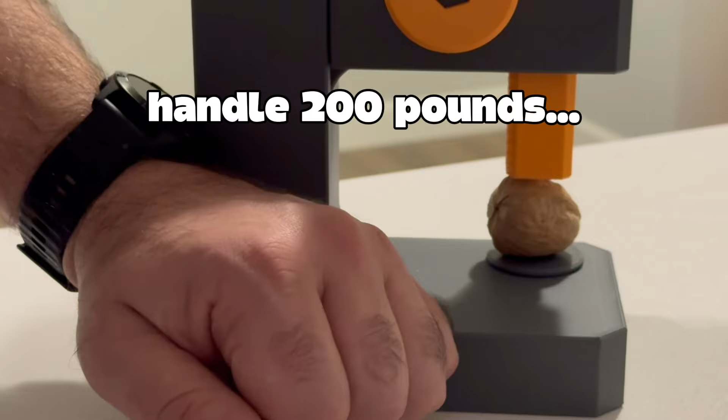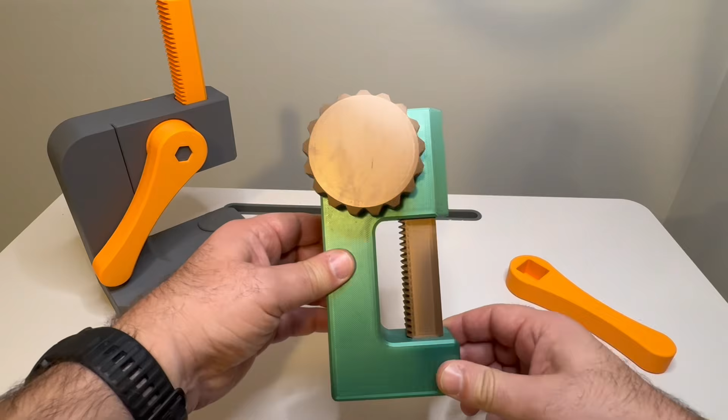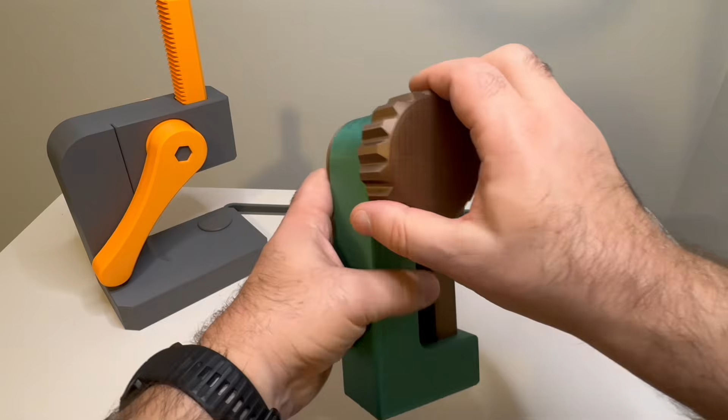This was a great little press. I made it with this knob originally and realized it was a lot stronger than the force I could generate. So we upgraded it and put this arm on, which made it an awful lot stronger.

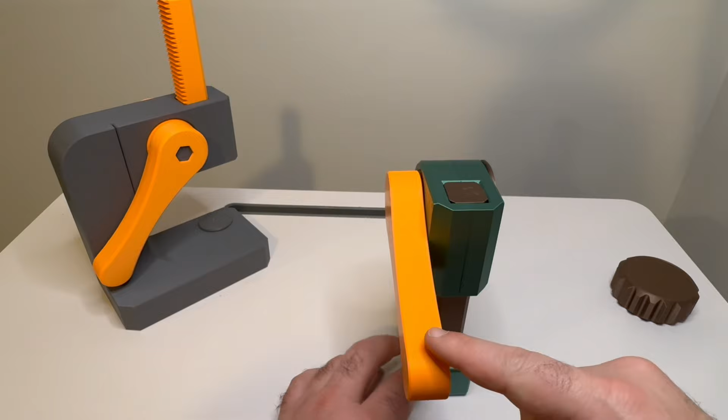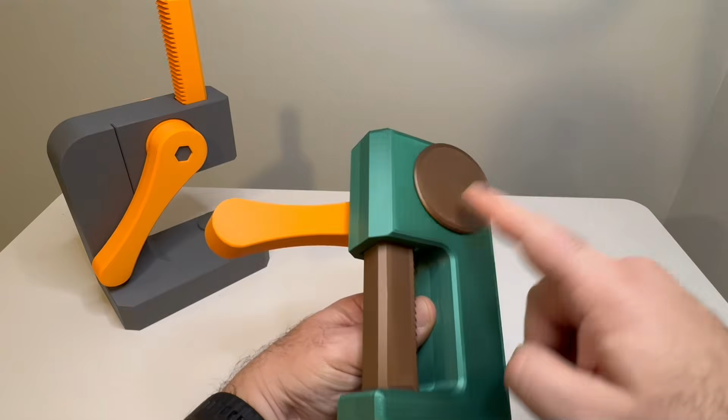But now we've got tipping. It wants to tip towards you, and it also wants to tip to the left, to the arm side. We also had a problem where there wasn't enough space to fit a very large part underneath the ram. In addition, it was hard to get these parts apart because I made them fit really tight, which is necessary for operation, but makes it really hard to disassemble.

In comes the 2.0. This still has the same working components as the other one. We've added a hole and a little part stand that covers it up when you don't want the hole. So if you're trying to knock something out and need to push a pin through, you need this hole for the pin to have someplace to go. And when you don't, you just cover it up and it's like it's not there.

This comes apart a little bit different. This plate comes off, and the rest is all printed as one big piece. But we've got the knockout holes, and we've got a much deeper throat here that makes this a lot more versatile.

And while this one still does want to tip, it doesn't want to go to the left. It still wants to come towards you, but you've got this big shelf to hold it down, and it works great.

We wanted this to be a fully 3D printed project as always. No glue, no fasteners. We also wanted to print without support, so this is printed entirely without support. Let's look at some of the design considerations that went into making this, and then we'll move on to assembly and printing.

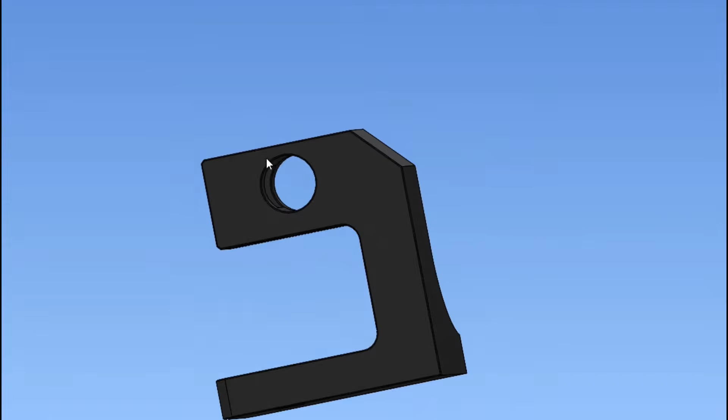So this is the press housing, and we want to print with no support. We want to lay it down like this. This face will be on the print bed, and that meant we couldn't print this wall.

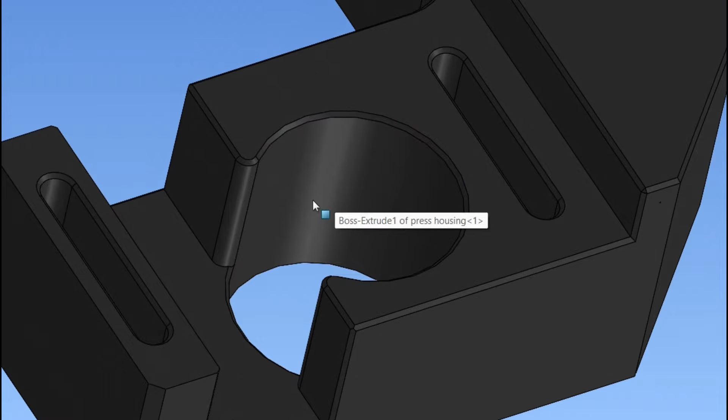This part's removable. These are the connecting features. They're tapered and go into interference, so you push these faces down flat and they're really stuck hard. You can get them back apart, but they don't come apart on their own. They seem to stay right where they're put during operation.

So that finishes the containment for the ram and gives it the means to move up and down. This is the inside of the plate for the side of the housing, and these are the features that interfere with the holes to hold the thing on.

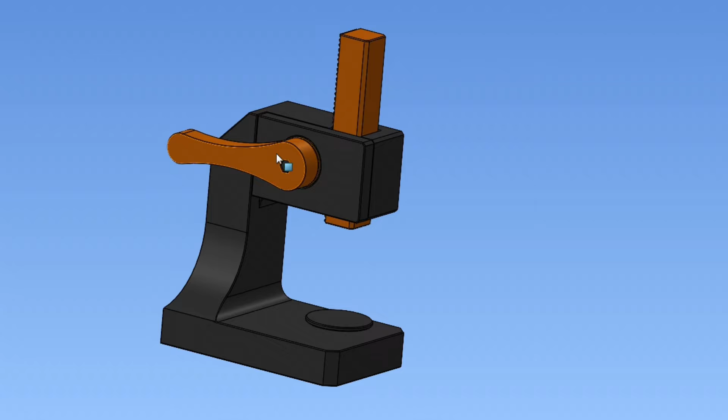So the general idea of this thing is rotate the arm, move the ram. You get a lot of leverage from the length of this arm, and inside there's a rack and pinion system. The handle is attached to this gear. When it turns, it's meshed with the teeth on the backside of the ram, and in the counterclockwise direction the ram goes down, clockwise direction the ram goes up.

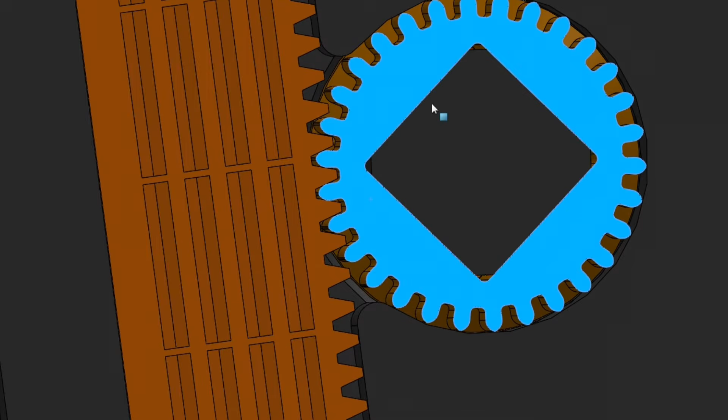On the inside, I've cut all of these holes so that we get more wall thickness material. Basically, the grid in here will print much stronger than the infill support would have, so I've got it in both the ram and the vertical posts of the back of the press.

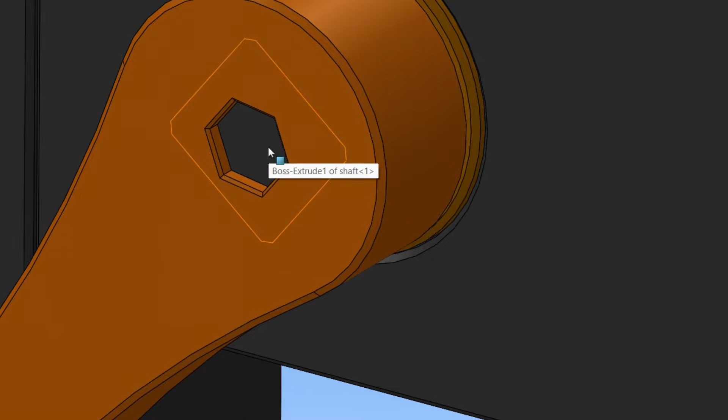These knockout holes were added from the last one, so this is another upgrade. It really helps to get them apart. It's easier to push than it is to pull, so this will help us take them apart when we need to. We've got a deeper throat here, so you can fit more things underneath it.

This is a removable part stand. If you use it with the part removed, you can use it to knock out pins and have some place for them to go while something's laying down.

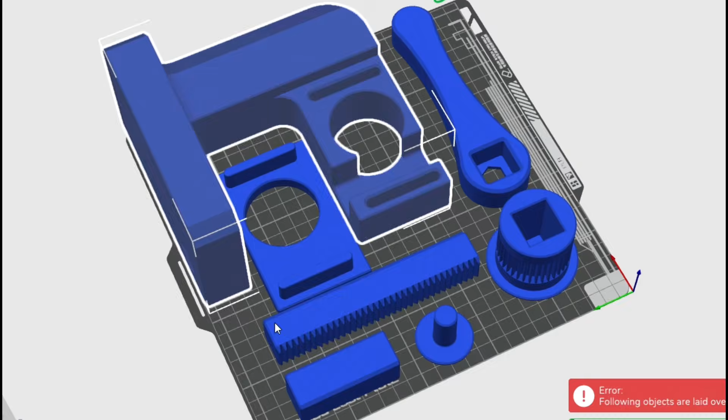This is the build plate setup. We want to print all these parts in these orientations to avoid the need for support and maximize strength. The press housing wants to be on the flat side with the holes facing up. This plate wants to have the post facing up. We need to print the teeth and profile for strength.

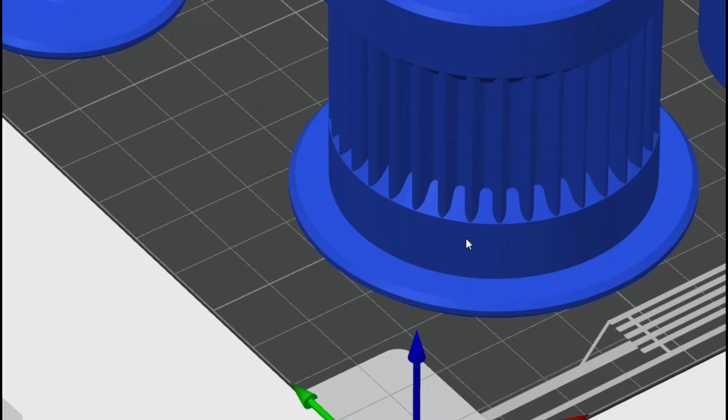The shaft we want the lines running this way for strength, and the gear we want this way for strength. Because we needed to have these large diameters that are larger than the gear, there are these chamfers on either side. That's an overhang that we can print that just allows us to make these shapes.

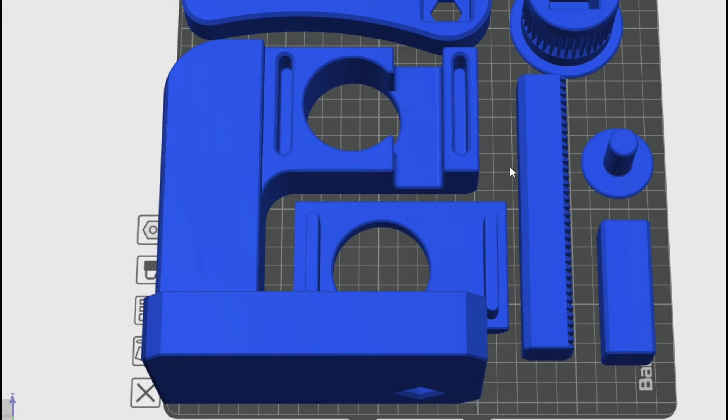So these parts need zero support, and I've sized it so that the dimensions on this are maximum 175. So if you've got a build plate that's 180 millimeters square, you'll be able to fit this. Not all of it at once, but this part will fit - that's the biggest one. So now we're going to take a look at putting it together.

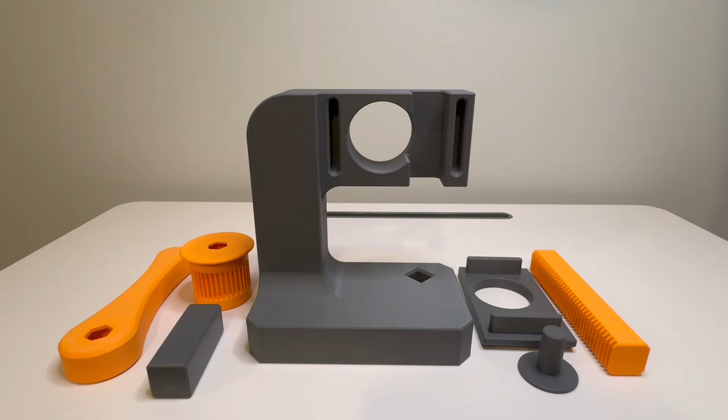Now that we've printed all the parts, this is the removable side, so we could print this without support. Remember, this printed flat down, so there's a big chamfer on the front. That matches up with this side.

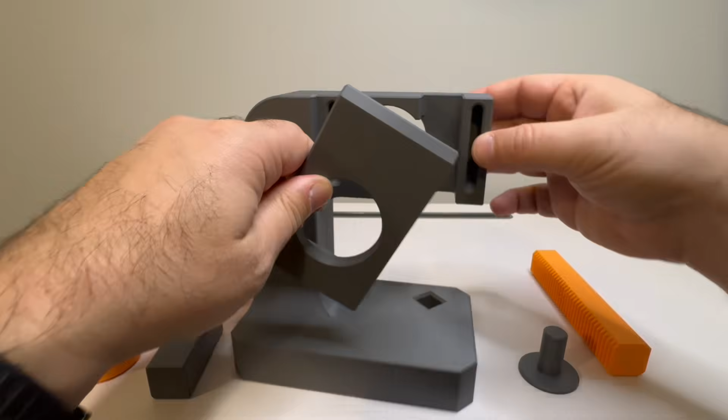We're going to put these in here, and you've got to push down pretty hard. You're going to really feel it suck all the way down to the face, then it's done. So gear goes in, then we put this post in. This is the shaft, and it's a little tight, so you force it down there.

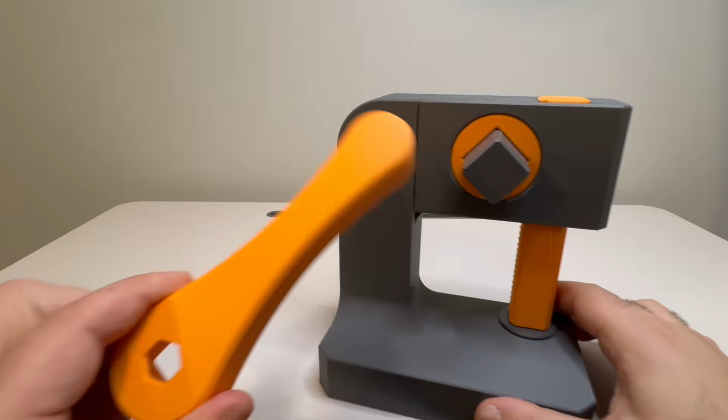Then we're going to put the part platform into the diamond shaped hole, then drop the ram in from the top. Now, when you put this on, you want it to be in the down position. So if this isn't it, to adjust it, you're going to take this out and find a new start position.

Now, when this goes on, arm horizontal. So you pull this all the way out, just give this a random spin. 2 or 3 tries, you're going to be in the right place.

You can push this all the way down, and when you rotate your arm, your press should come all the way up. When it goes all the way around, it'll still be engaged. So if you want it to stay up, just let all of the handle be on this side of the pin, and gravity will hold it up for you.

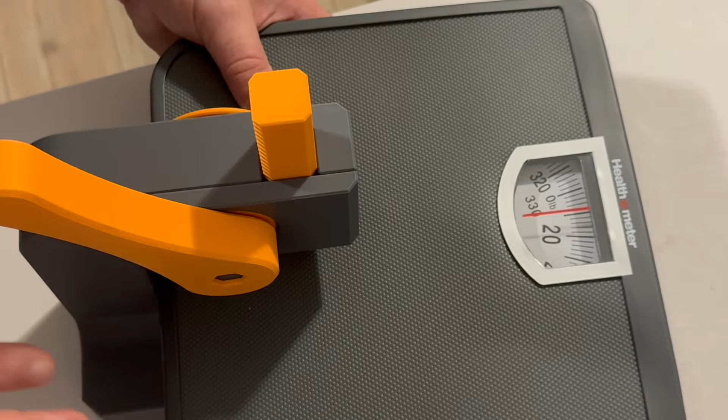Now let's go test it and see how strong it is. I got a bathroom scale, just a spring scale, and we're just going to push on it and measure how much force we get before we break. So here goes nothing. Okay, so I had to move the handle because I wasn't strong enough to break it.

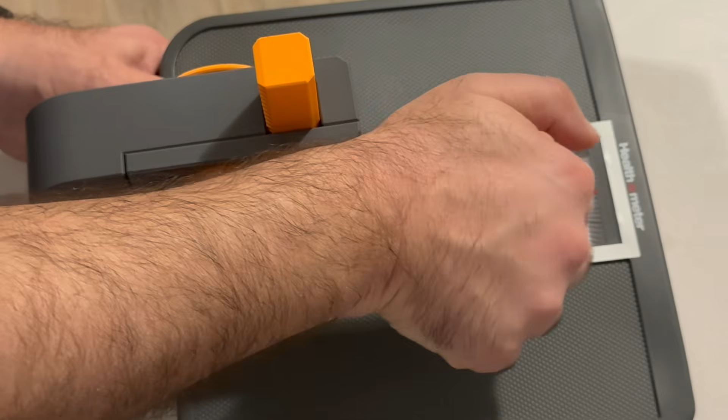So now it's in a new orientation and we'll go for test number 2. Hope we can see the force.

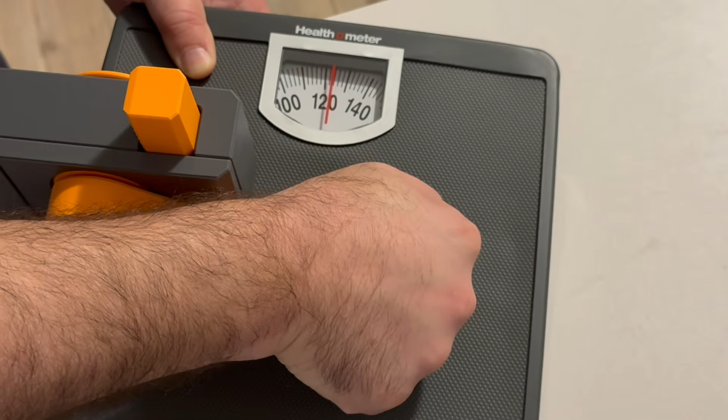All right, so I've discovered that because I'm not making contact with this correctly, when I push down, I max out about here, which is just south of 130. But if I bring it over to the side, it seems to want to keep going. Let's see - there's 200 pounds.

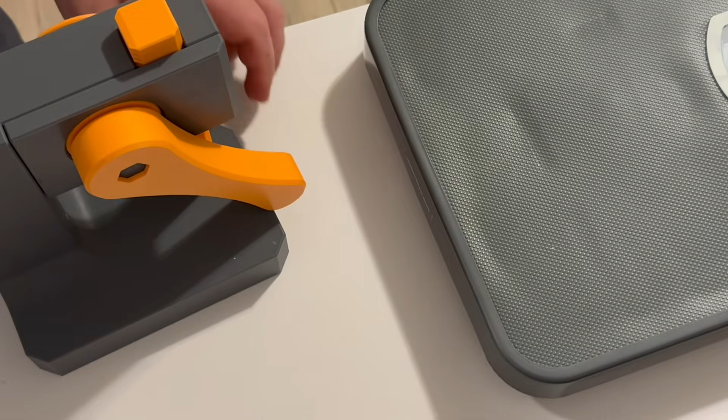I don't think this scale is good enough that I'm actually going to break this, and it's actually pretty strong, but at 200 pounds, I'm happy with it. I don't think it owes us any more than that. But anyways, it'll smash a walnut, and it'll destroy candy.

We got it to 200 pounds, although that measurement is admittedly disappointing. Maybe in the future we'll actually find a way to break this thing. But for now, I think I'm just going to put it in service and be happy that it works well.